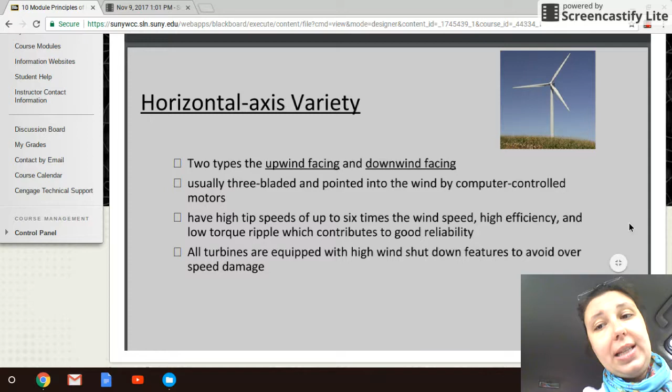And we're just going to quickly review. Horizontal axis wind turbines are ones where the low-speed shaft is positioned horizontally in the nacelle system of my wind turbine. And they come in two types, upwind facing and downwind facing. These are typically three-blade systems, and they're going to have rotation systems based on what components they need based on the amount of wattage I want to produce.

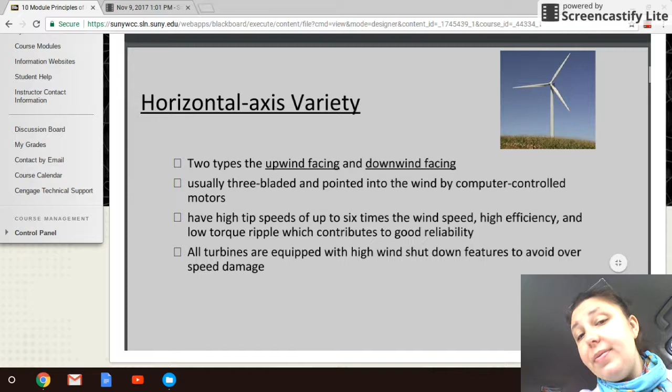There are both pros and cons to horizontal axis wind turbine systems. One of the cons that exists is the weight at the top. And so if I'm concerned about needing to have a nacelle or a housing body that's going to hold things like my generator system, I am going to be concerned about balance and weight and counterbalance.

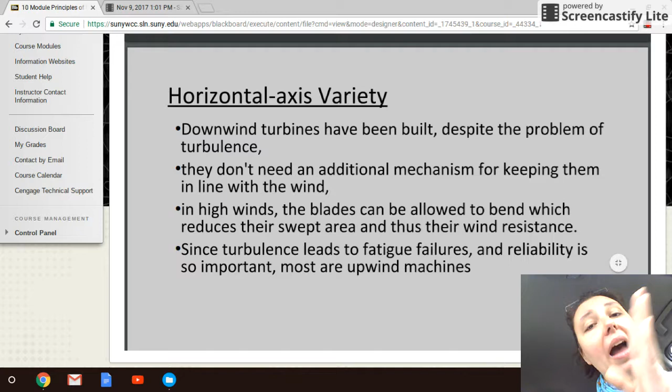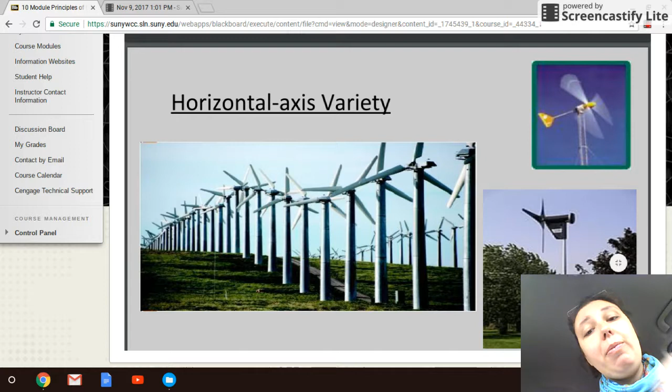And therefore, if that is something that I have to look at heavily, I might opt to build a vertical wind turbine system. And one of the benefits of that vertical system will be that all the weighted things will be at the base of my module. Here's some pictures of horizontal axis wind turbine systems, quickly talking about advantages, disadvantages, bringing into vertical axis.

So vertical axis wind turbine systems have what would be in the nacelle. So the low speed shaft will connect to maybe a gearbox if I'm trying to produce a lot more power, which will then turn to a high speed shaft, which will then connect to a generator to produce. And all of that is actually on the ground. So I can put all my weight at the base of my system.

And I'm going to actually show you the three original designs of vertical axis wind turbine systems. And these three are substantially different from one another. So I'm introducing you to these three, and they're kind of like the flagship models. They're the first like them, and they're so different that it's important to know these three and then understand that out of these three designs, there have been so many plays on these designs.

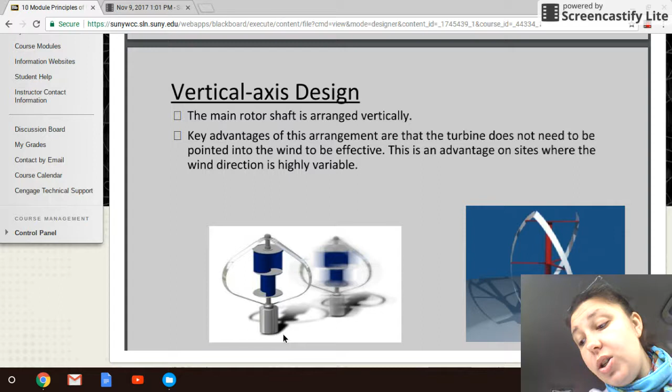So if you begin to look up things like vertical axis designs, you will see all different forms and shapes and things. But the three systems I'm introducing you to are like the three inspirational originals that everybody's basing all these new designs off of. And so without further ado, let's talk about the vertical axis wind turbine design that is the Darrieus.

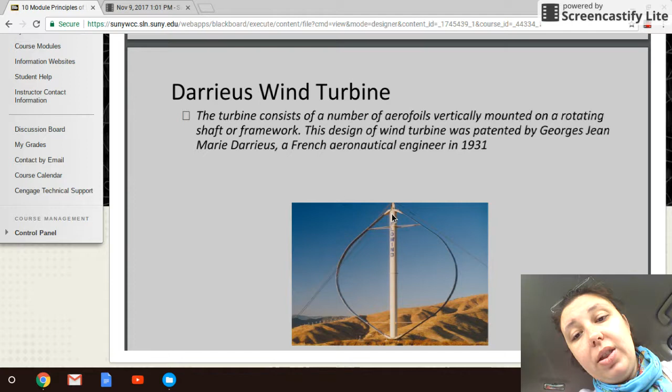So the Darrieus system is one where I have two wind foils, sometimes three wind foils, and they are bent into this egg beater shape, and they will rotate based on the wind smacking them and turning the low speed shaft inside the double blades. Another example looking down from the top on a Darrieus system.

This is a three-bladed version of a Darrieus system, and this is a concept design of the Darrieus system that's been updated. Like I said, we've taken a model, so this is an original Darrieus, and then this is a concept that somebody built based off of that original concept idea from the 1930s. Once again, down here, the gearbox goes into my generator system. So low speed shaft, gearbox, high speed shaft, generator to make electricity.

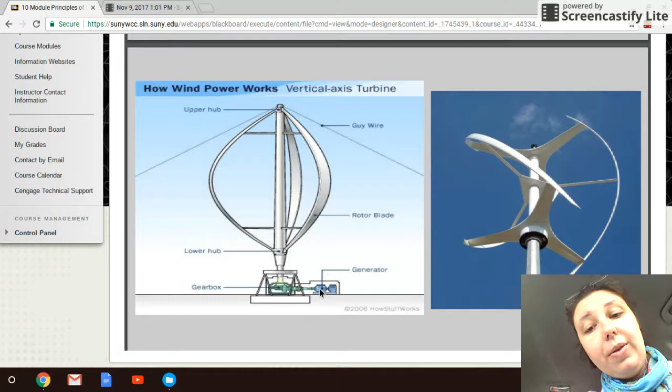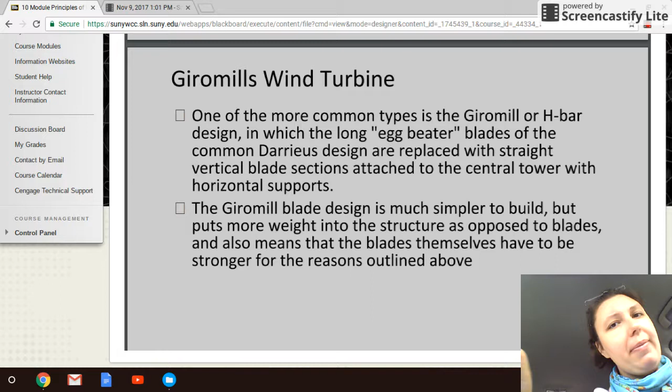Giromills. Giromills I like to think of as the double-bladed airfoil systems. They have kind of like two sides or three sides that stick out, and they'll be like little cups or little blade foils out on the sides. I've even seen ones that kind of look like Mickey Mouse ears, like these weird tambourine drum things out on the sides. And so these kind of look like this.

They're these T-bar H-shaped structures, which can once again come in two blades or three blades, depending on who's designing it and how they're making it work. And the way they've set up these systems is that the highest weight is out on the wingtips. They're out here so that they can really catch the air out on the edges. And so they're held aloft out along bar structures.

Now, Giromills can be very fragile. In high wind speeds, they can take those blade tips right off. And so they're kind of a system that you wouldn't want to put too high aloft. They're a system that you're going to want to keep closer to the ground.

On the other hand, if you're trying to produce power closer to the ground, something that's more around the height of a standard three-story home, then you might want to think of a Giromill system. Because it is so weighty, it really needs to be close to the ground. You're not trying to play with something that would catch high wind speed.

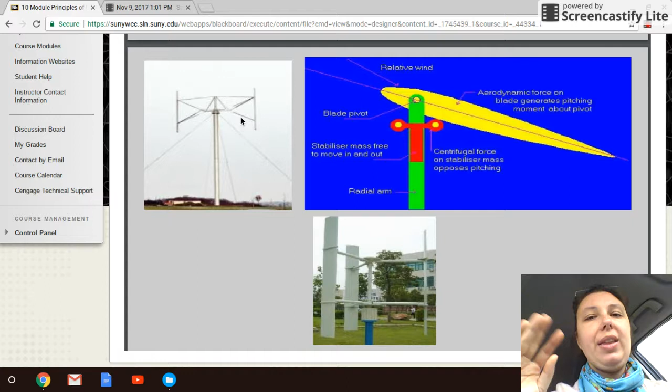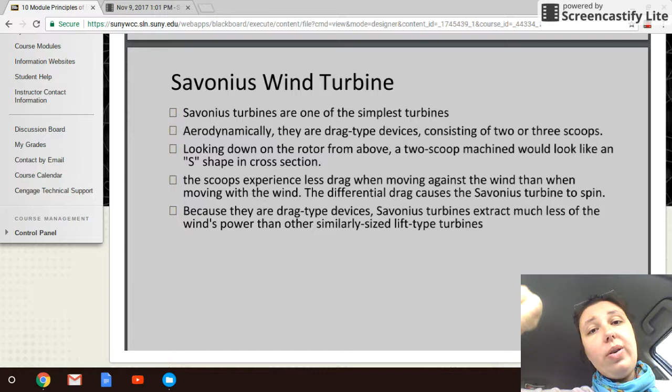The final system is the Savonius system. And the Savonius system is kind of easy to remember because they look like an S if you look at them from above. So if you look down at a Savonius system, it has sort of an S or a double scoop shape. Makes it kind of easy to remember.

Savonius turbines are something that you can go out and build today: buy yourself a bunch of buckets, cut them in half, and offset them so that if you look down at the bucket from above, it has that S curve, and it can work as a double scoop. And it would just turn your shaft in the center. So that's a Savonius system for you to work with.

And you'll see things that combine it. Even in that first slide when I was introducing vertical axis wind turbines, I had something that was a combination Darrieus system with a Savonius system in the center. So it was trying to catch both. You could see where that would create a lot of torque on the system, where you'd have a lot of kickback and a lot of fluctuation in frequency moving through your shaft. And so it would shake a lot. It'd have a lot of vibration on that system, making it fatigue easily.

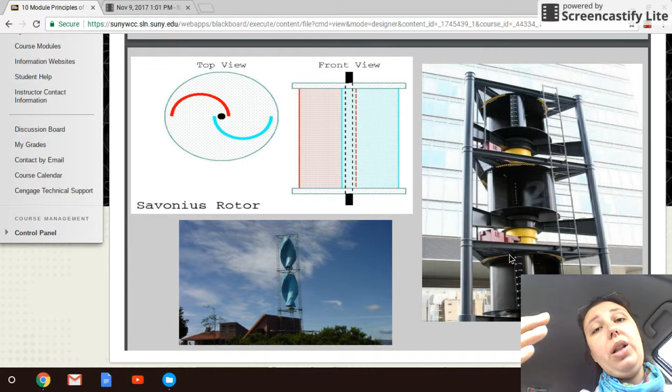So there's a lot of mistakes that can be made with these systems. They're great for small scale. These are not something that you're going to produce over 100 kilowatts with. These are small scale models. These can even be things that you would be comfortable building yourself. So that brings me to building a wind turbine yourself.

Now, I'm a hobbyist, and I like this sort of thing. It is something that I've done back in grad school. I used to run a workshop where people would come and stay for the weekend, and we'd teach them how to build small-scale wind turbines for themselves and then actually put one up on site. And it was a completely hands-on workshop that we would do.

It's something that I've played around with at home, and I will show you my home-built little baby that I drag around the yard. And when my husband is out mowing, I have to run out after him and scream, "Don't mow over my lines," and move it around. So I'll show you some of this. And like I said, it's something that I hobby with because my home in Ridgefield is not actually a good place for wind power.

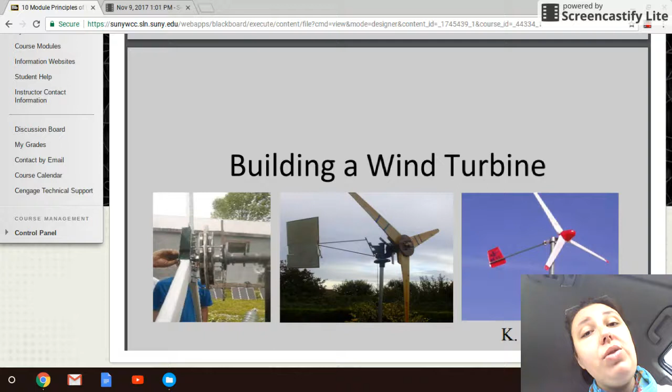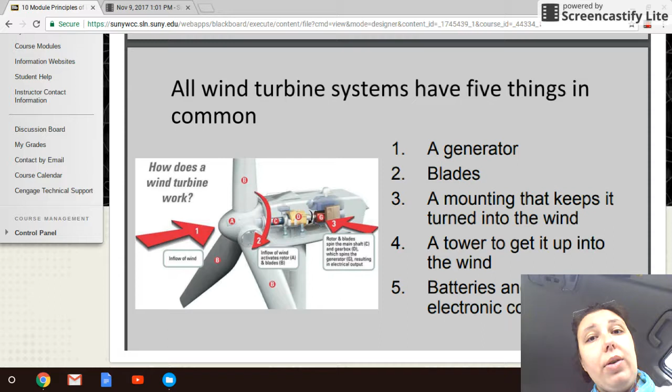And so the common five things that I want to think about are my generator, the blade structure that I'm going to build, and how I'm going to mount it. So am I trying to keep it up in the air, and how am I doing that? Some type of tower to mount it on, or a low speed shaft tower that I'm going to mount my vertical axis wind turbine blades on, and then how I'm going to store my energy. So my batteries or my control system, or if I'm pumping it directly into the home.

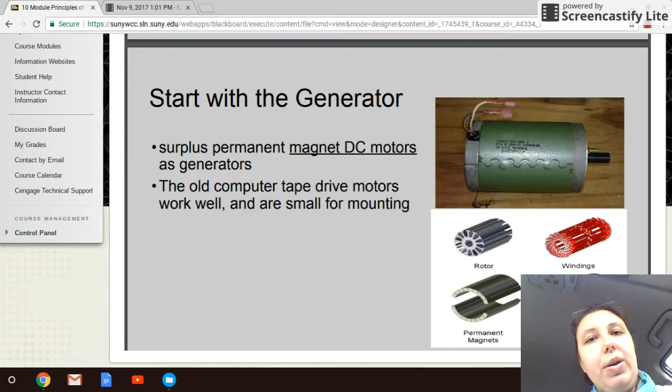As far as generators, you can use any generator you want. You can even jump on Hobby Lobby nowadays and buy yourself a small hobby generator for your purposes. But one of the things that works really great if you can get your hands on it is an old tape generator, one of those old DC motor magnet generators from old tape drive computers, the early giant clunker computers in the 1970s. They last forever. These things are like indestructible.

One of the things that you're going to want to look for when you buy a generator is something with the lowest number of rotations per minute. Because if you're building it yourself, you're not going to get a lot of rotation. So you're going to look for the lowest number of RPMs. You're going to want something like a 325, which is sort of a standard, and hooks up to a 30-volt battery style generator system.

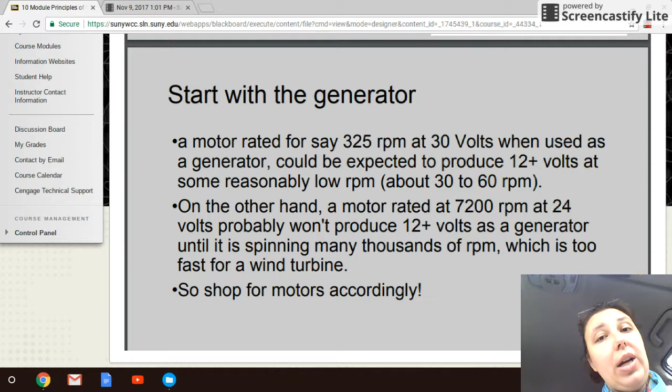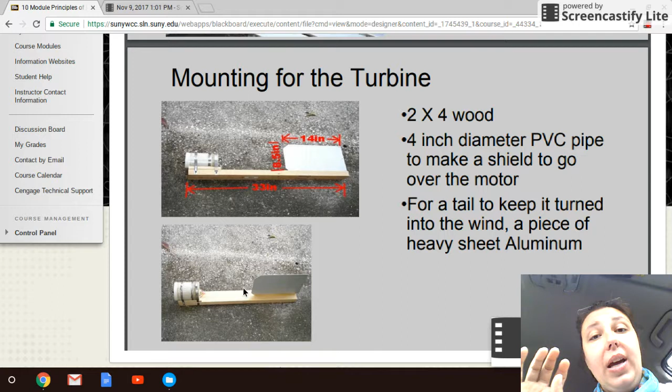On this note, I'm going to pick up with part 3, and we're going to talk a little bit more about how we build one of these systems ourselves, and then we'll talk about